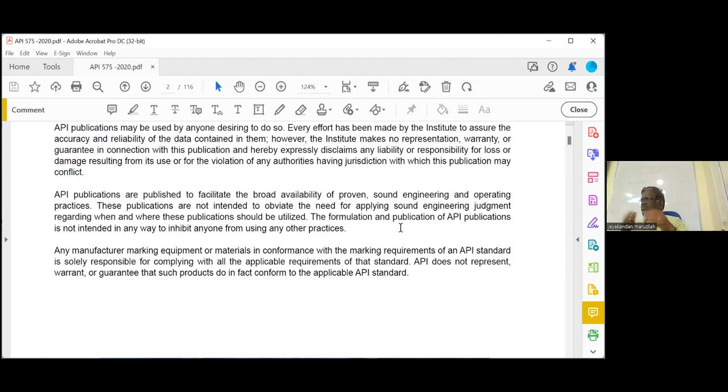Generally the standard pattern so far is around 10 questions, but this time we are expecting there may be an increase in questions in this code book. If they are increasing here, the number of questions in 653 will be reduced. 653 and 575 will be almost the same, will be repeated - actually it's just a revision. It looked like a revision only, a revision of 653.

Okay, so please highlight page number 4. What is meant by alteration? It is a closed book question, mark it as a closed book question. So the definition of alteration is any work on a tank that changes the physical dimension or configuration in accordance with the API 653 guidelines. So alteration means something which will change the physical dimension.

I told you the definition for alteration is revised now. In the previous edition, a nozzle greater than NPS 12 inch is considered an alteration. Now they've changed this in 575 as well as 653. Now, as per the latest version, alteration means only increasing or decreasing the shell height.

Applicable standard we already know - this all repeats, we will not highlight it. Only additional things will be highlighted.

What is meant by change in service? This is very important, this question - what is the change in service? A change from previous operating conditions involving different properties of the stored products such as specific gravity, corrosivity, or different service conditions of temperature. And again understand, change in service may be a severe service or it may be a non-severe service also. So change in service means if you are changing the operating condition or stored product - that's change in service.

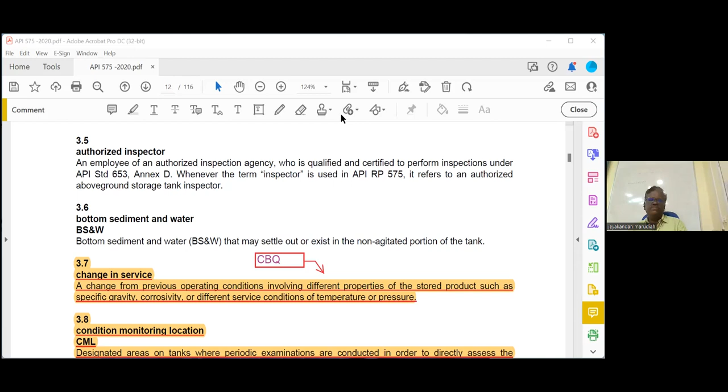Then what is meant by CML? I think this is a new terminology. Okay, but it's not related to tank specifically. What does CML mean? See, when you are monitoring...

What are the different types of inspection we have as per 653? Routine in-service inspections - what is routine inspection? Every month it is conducted by the operator on the ground level, he will check. Next one is called external visual inspection, also without NDT. What is the formula for external visual inspection? Lesser of 5 years or RCA by 4 years. Third one is the UT thickness measurement - what is the formula? RCA by 2N or 15 years, whichever is less.

Now apart from this, what is meant by CML? In the tank area, suppose you think a particular area needs to be regularly monitored using NDT - it may not be only thickness gauge, you can do PTMT. This area fatigue cracks are coming, this area stress corrosion cracks are coming. These periodically monitored areas are called CMLs - condition monitoring locations, where you are monitoring condition using various NDT methods. So highlight this one: designated areas on tanks where periodic examinations are conducted in order to directly assess the condition of the tank. CMLs may contain one or more examination points and utilize multiple examination techniques.

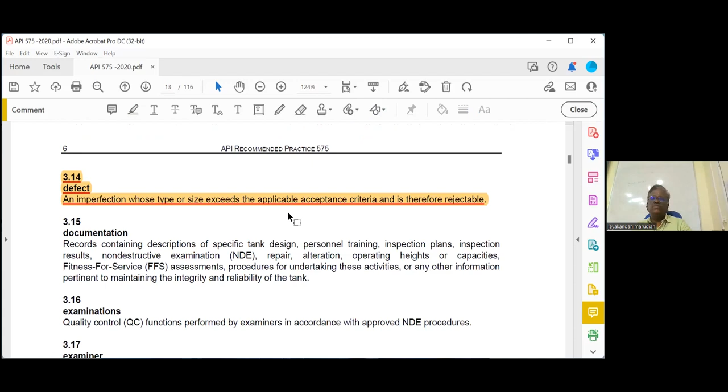So what is meant by examination? As per API code, this is NDE. Normally we call it NDT. They are called examination.

As per code, what is meant by testing? Hydro test, pneumatic test, or leak test to check the integrity of the tank, or mechanical test - they are considered testing. NDT is not considered as testing by ASME and API codes.

Then fitness for service, very important closed book question. A methodology where flaws and other deterioration or damage or operating conditions contained within a tank are assessed in order to determine the integrity of the tank for continuous service.

General corrosion is distributed more or less uniformly over the surface, as opposed to localized corrosion.

Indication - what is meant by indication? The response of the NDT. NDT showing something - a response or evidence resulting from the application of NDE. Mark it as a closed book question.

Then these are not important. Jurisdiction - what is meant by jurisdiction? A legally constituted governmental administration that may adopt rules relating to tank.

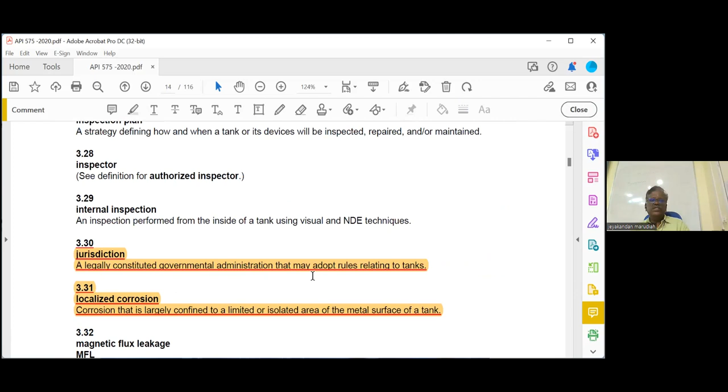Localized corrosion that is largely confined to a limited or isolated area of the metal surface of the tank.

Then this is open book question. What is meant by minimum acceptable thickness? The lowest thickness at which a tank component should operate, as determined by the parameters in the applicable tank design standards such as 650, 653, etc.

And the fitness for service - so what is the minimum required thickness? We call it, in a tank, the minimum acceptable thickness.

Out of service - so what is meant by out of service? Designates that a tank is clean and empty of product. A tank during original construction, removed from service and cleaned or returned - this is all out of service. If it's an empty tank, or a retired tank during construction, this is all considered out of service.

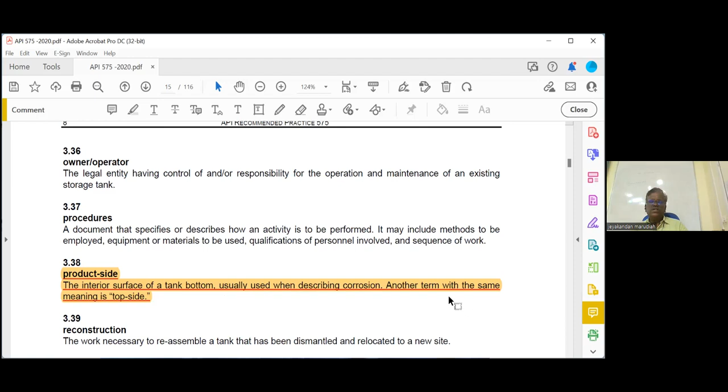The next page, what is meant by product side? The interior surface of the tank bottom, usually used when describing corrosion. Another term for the same meaning is top side. So top side, inside, product side - all are same. Underside, bottom, what is called soil side - these are same.

Then RPB, release prevention barrier - that is a closed book question. Steel bottoms, synthetic materials, clay liners, and all other barriers are a combination of barriers placed in the bottom of or under the above ground tank, which have the following function: preventing the escape of contaminated material and containing or channeling the released materials.

Repair - this is important closed book question. Any work necessary to maintain or restore a tank condition suitable for safe and leak-free operation.

Soil side - the exterior surface of the tank bottom, usually used when describing corrosion. Other terms are underside, bottom side - all are same.

Then sounding - what is meant by sounding? Doing a hammer test. By sound, we can find out whether the thickness is reduced or not by hearing the sound. An inspection technique that relies on impacting the surface - mark it as a closed book question - with a tapping rod and listening for hollow sounds that indicate delamination or loss of continuity.

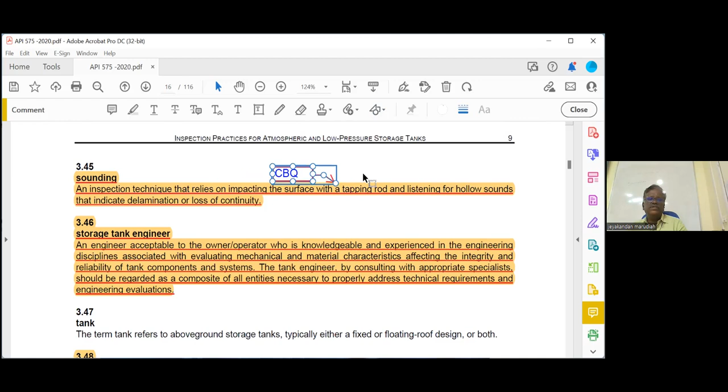Then who is a storage tank engineer? An engineer acceptable to the owner-operator who is knowledgeable and experienced in the engineering discipline associated with evaluating mechanical and material characteristics. Then temporary repairs - repairs made to a storage tank to restore sufficient integrity to continue operation until a permanent repair.

Mark it as a closed book question. But we didn't discuss anything about temporary repair in 653.

Because I told you during the 653 class, the difference between pressure vessel piping will be on one side, storage tank will be on the other side.

In pressure vessel and piping, all fillet weld patches are considered temporary repairs, so they should be replaced in the next shutdown. But in storage tank, fillet weld patches are considered as permanent repair, provided the owner-operator approves that. In piping and pressure vessel, they are never considered a permanent repair - they are just for the time being.

Okay, so for tank, fillet weld patch is permanent.

Then water bottom - see the definition of bottom sediment and water.

Bottom sediment here, I forgot to highlight. Please go to section 3.6, bottom sediment and water. This is important - bottom sediment that may settle out in the non-agitated portion of the tank at the bottom. Mark it as a closed book question.

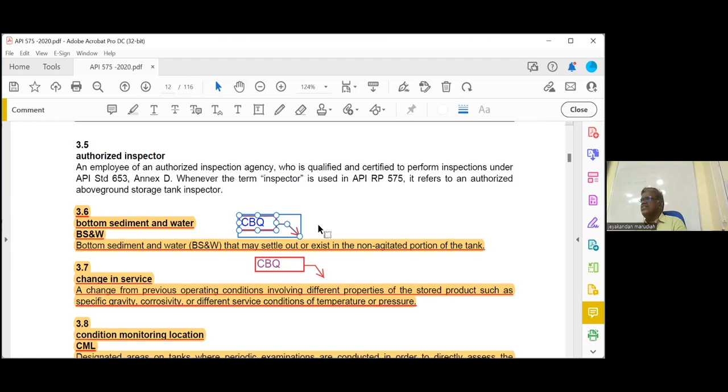Now we will go to the terms - type of storage tanks. Section 4.1.1, highlight the last line: guidelines for inspection of pressure vessels operating at pressure greater than 15 psi are covered in API 572. Remember, during the introduction class last week I told you API 650 covers only atmospheric above ground storage tanks.

But there may be internal pressure. What is the maximum internal pressure allowed? 2.5 psi. Vacuum, how much is allowed? 0.5, not 0.25. Now, if the pressure is more than 2.5 up to 15 psi, it is covered in API 620, the low pressure storage tank code. But if the pressure is more than 15 psi, it is covered under pressure vessel rules - guidelines for inspecting vessels greater than 15 psi are in API 572, which covers pressure vessel fabrication.

That's temperature. Next, storage tank - on the pressure side, this one is API 620, low pressure storage tank, it will come under storage tank temperature considerations. Now please go to 4.1.4, storage tanks with auxiliary equipment.

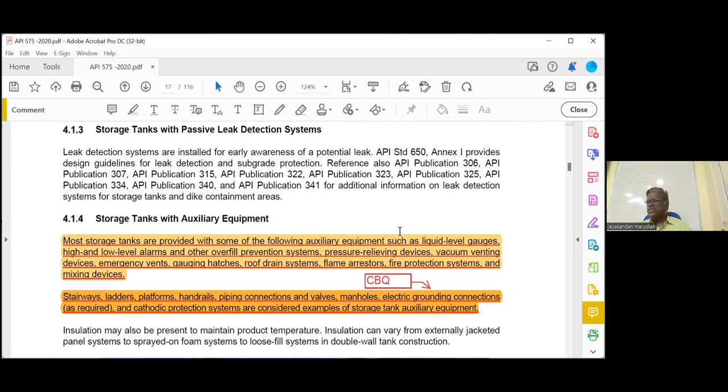Then, atmospheric storage tanks - section 4.2.1, highlight the first three lines. Atmospheric storage tanks are designed to operate with internal gas or vapor space at a pressure close to atmospheric pressure. Such tanks are usually constructed of carbon steel, alloy steel, aluminum, or other metals depending on the service. Remember, when API 650 came into picture in 1961, before that it was API 12C. Apart from 12C, there was also 12A, 12B, 12D. What are 12A and 12B? Bolted tanks and riveted tanks. These are not important now - generally welded tanks, some riveted tanks were 12A, and bolted tanks were 12B. 12A is now withdrawn, 12C is now changed to 650, and 12D and 12E are also withdrawn - they are not in use now.

Now, use of atmospheric storage tanks - where do we use atmospheric storage tanks versus low pressure storage tanks? It depends on what product you are going to store. Highlight this: atmospheric storage tanks in petroleum are normally used for fluids having true vapor pressure less than atmospheric pressure. That line is important - vapor pressure should be less than atmospheric pressure.

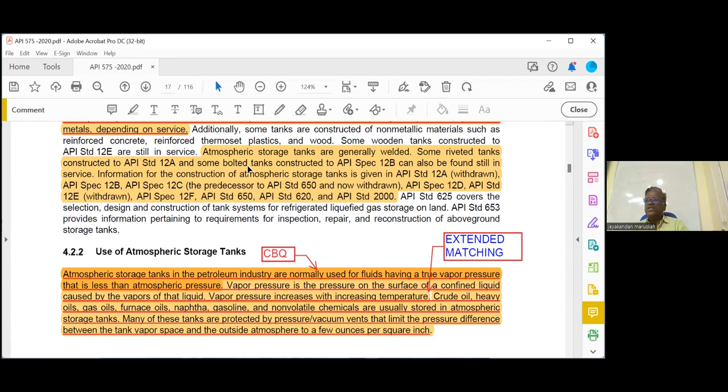For extended matching, I told you there are three other patterns - one is multi-choice, another is multi-response, third is extended matching, and fourth is drag and drop. It was asked in extended matching which product we store in atmospheric storage tanks - so this is the list. Low pressure storage is given later - what products can we store in low pressure tanks? We have to match it.

Next, atmospheric storage tanks, 4231, cone roof tanks. The most common type of atmospheric storage tank is the fixed cone roof tank. Fixed cone roof tanks are typically up to 300 feet in diameter and 64 feet in height, although larger diameters have been built.

These roofs are normally supported by internal structures - rafters, girders, and columns. So generally they will have columns supported on the bottom, but can be fully self-supporting in smaller diameters, typically 60 feet or less.

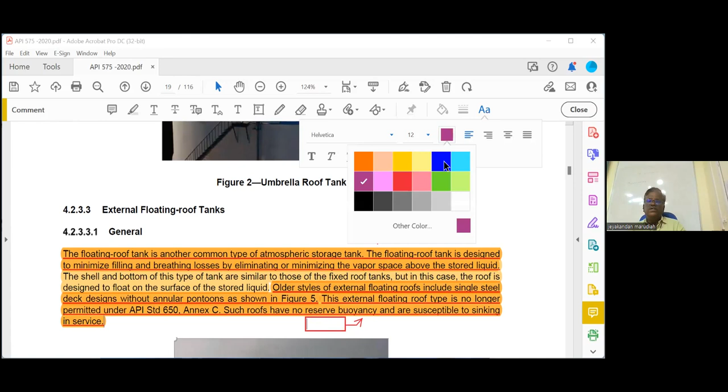Older type external floating roofs include a single deck design without annular pontoons. This type is no longer permitted by API 650 Annex C - we need a pontoon now. Older types did not have a pontoon; this is important, it is what was asked in the last exam. Such roofs have no reserve buoyancy and are susceptible to sinking in service.

42332. Some floating roof tanks have fixed aluminum geodesic dome roofs installed on top of the tank shell to reduce product vapor loss or to eliminate the need for drain water - it will not allow water in. These are considered internal floating roofs for the purpose of emission control, confined space, etc. So internal floating means there will be a fixed aluminum roof and a floating roof.

You can see here, this is the annular pontoon - at its center there is plate only. This will be the pontoon. Pontoon means the part which floats on the roof, and this is the complete double deck pontoon.

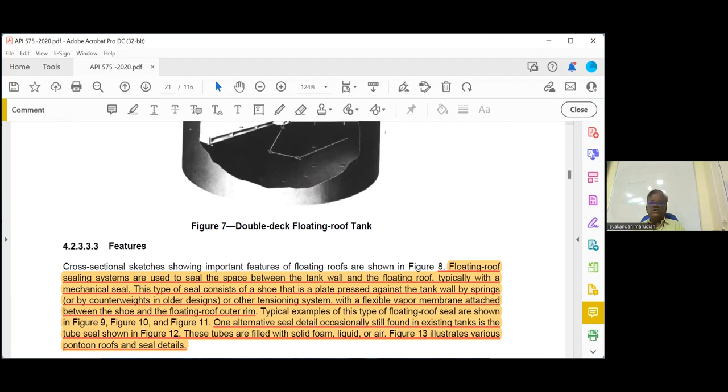42333. Floating roof sealing systems are used to seal the space between the tank wall and the floating roof, typically with a mechanical seal. This type of seal consists of a shoe - a plate pressed against the tank wall by springs or other tensioning system, with a flexible vapor membrane attached between the shoe and the floating roof outer rim. One alternative seal detail occasionally still found in existing tanks is the tube seal shown in figure 12.

These tubes are filled with solid foam - foam-filled seals are still in use, filled inside with foam. This is the floating shoe seal - you can see the plate presses against the shell so that there is no vapor loss. This is the foam-filled type.

These are not important, please go to page number 23. Low pressure storage tank, 4.3.1.

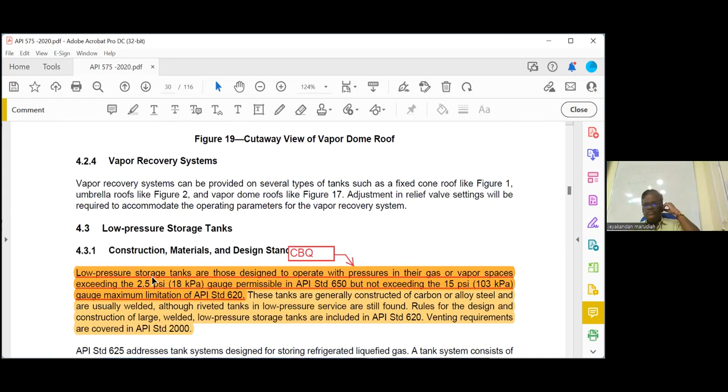Highlight this, it's a closed book question. Low pressure storage tanks are designed to operate at a pressure exceeding 2.5 psi, permissible by API 650, but not exceeding 15 psi - that is the maximum limitation under API 620.

Use of low pressure storage tanks - this is important, you should know what we store in atmospheric storage tanks versus low pressure storage tanks. Low pressure storage tanks are used for storage of more volatile fluids having a true vapor pressure exceeding the limit in API 650 but not more than 15 psi: light crude oil, gasoline blending stock, light naphtha, volatile chemicals, LPG, LNG, liquid oxygen - all of this we can store. Mark it as an open book question.

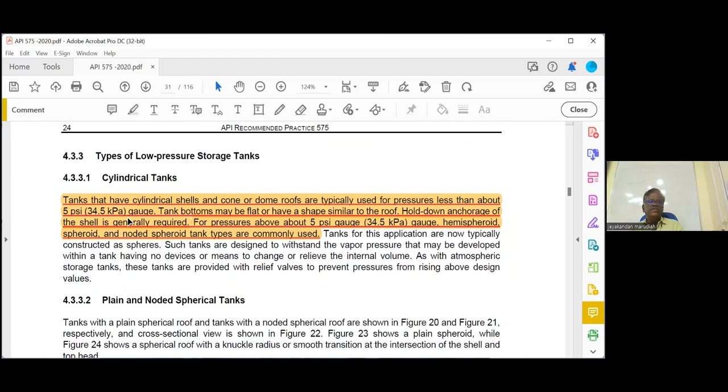Types of low pressure storage tanks. Tanks that have cylindrical shells and cone or dome roofs are typically used for pressure less than 5 psi. This is about the low pressure. Tank bottoms may be flat or have shape similar to the roof. Hold down anchorage at the shell is generally required for pressure above 5 psi.

Hemispheroid, spheroid, and noded spheroid tank types are commonly used. So what is a hemispheroid? You can see this one here. This is called the hemispheroid. Next page we can see here, this is the noded hemispheroid.

Then this is the plain spheroid, which we call a sphere. And this is the plain hemispheroid with the knuckle radius. And this is called again noded spheroid. Okay, these are not important.

Then please go to chapter 5, section 5.1.1, reason for inspection, page number 28.

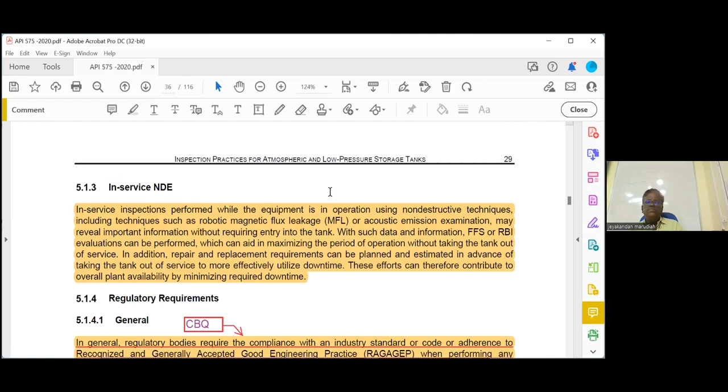This is an important closed book question. The basic reasons for inspection are to determine the physical condition of the tank and to determine the type, rate, and cause of damage mechanism and associated deterioration. That is the basics for the inspection: physical condition, and what type and what rate of damage mechanism happens.

Then process safety, highlight section 5.1.2. One of the primary reasons to conduct periodic scheduled inspection is to identify deficiencies that could result in a process safety incident such as loss of containment, which could lead to fire, toxic release, or other environmental hazard. These deficiencies should be addressed as soon as practical through evaluation, further inspection, or repair.

The next page, regulatory requirements, section 5.1.4.1. This is an important closed book question.

In general, regulation means local government rules. Local government requires compliance, the industry and the standard to adhere to recognized and generally accepted good engineering practice, that is called RAGAGEP. When performing any inspection and repair activities, many regulatory groups, including OSHA, PHMSA in the United States, require that operating companies follow internal procedure. This last line is important, so we have to follow the company internal procedure in addition to following the codes.

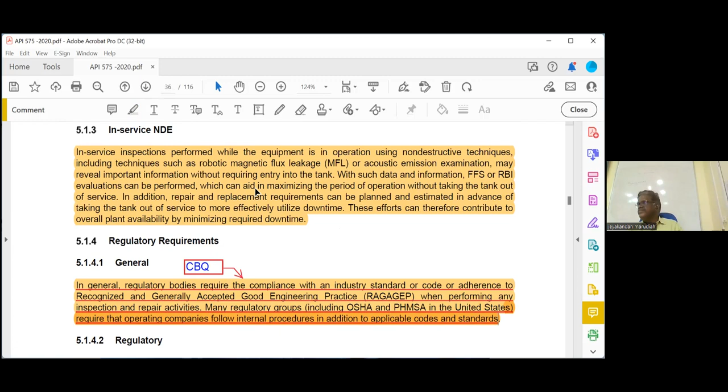These are not important. Then 5.2.1, deterioration of the tank. Corrosion is the primary cause of the deterioration of steel storage tanks and accessories. Locating and measuring the extent of corrosion is a major reason for storage tank inspection. If left unchecked, tank deterioration can progressively lead to failure, which may adversely affect or endanger personnel or the public, environmental and property damage, and business interruption or damage to reputation.

Now we will go to the 1 by 1 portion. This is actually almost our revision of the 653 now. Many things we have already seen in 653.

Atmospheric corrosion can occur on all metallic tank components exposed to atmosphere. The type of tank, construction details, environmental conditions can all affect the location, extent, and severity of external corrosion. For example, a sulfurous, acidic, and marine atmosphere can damage protective coatings and increase the rate of corrosion. External surfaces of the tank and auxiliary equipment will corrode more rapidly if they are not protected with coatings. Where surfaces are in contact with moisture or the ground, extended contact with water is likely to cause localized corrosion.

Before, there was a sentence here which is now removed. Suppose you are in India and you want to construct a house, what facing will they ask about, south facing, east facing, north facing, west facing? Now which facing house will receive more sunlight?

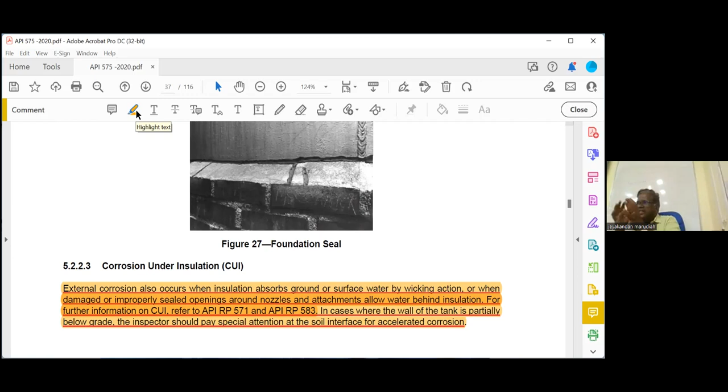Next page, riveted tanks. You can still have some riveted tanks - I think 653 covers this. For riveted tanks, 6 inches away we take the efficiency as 1. Remember, for welded, 1 inch away we take E equal to 1. For riveted tanks, 6 inches away we take the efficiency as 1.

Now this line is important: riveted tanks have many niches where concentration occurs, because at the rivet there is a gap, which causes concentration cell corrosion. Leaks at the seams of riveted tanks can cause failure of the external coatings, allowing external corrosion to develop. If there is a leakage, it will affect the paint and coating, which then causes corrosion.

Then internal corrosion: the occurrence of internal corrosion in a storage tank depends on the contents of the tank and the material of construction - what you are storing and what the material is. That is a closed book question.

Now the next topic is product vapor and BSW. If you take a storage tank, on the underside, what corrosion happens? This side we call soil corrosion - that's why we go for cathodic protection. And what corrosion happens on this side? This is called bottom sediment and water corrosion - for that we go for lining.

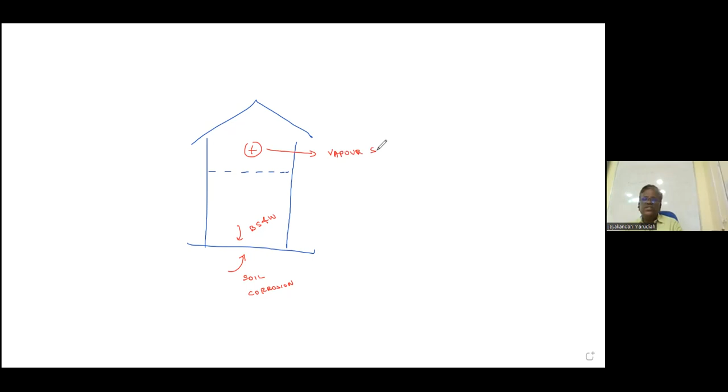But here there can be a portion - suppose this is my roof, and my fill level is only up to here - this area may have a portion. This is called vapor space. Vapor space is affected due to oxides - they can evaporate, and that oxygen and other oxides can promote corrosion. So these are the important points.

Crude oil and petroleum product tanks are usually constructed of carbon steel. Internal corrosion of these tanks in the vapor space above the liquid level can be caused by H2S vapor (hydrogen sulfide), water vapor, oxygen, or any combination of these. In areas in contact with the stored liquid, corrosion is commonly caused by acid salts, hydrogen sulfide and other sulfur compounds, dew point corrosion, or contaminated water that settles out and mixes with solids, typically referred to as BS&W, bottom sediment and water.

So in the vapor space, corrosion is caused by hydrogen sulfide vapor, water vapor and oxygen, or a combination of these. At the bottom, it's caused by hydrogen sulfide, other sulfur compounds, dew point corrosion and contaminated water, referred to as bottom sediment and water. Both of these are open book questions.

Linings. Some tanks can have a lining. What is the purpose of the lining? To protect the bottom. In some particularly corrosive service, it may be necessary to construct tanks with more resistant materials such as aluminum or stainless steel. These experience deterioration less commonly, but cost more. These details are not important, leave them.

Now we'll go to wooden tanks. Wooden tanks are very rare now; they are the older style of tanks. Wooden tanks are generally used for storage of food products, like fruits, for food product storage.

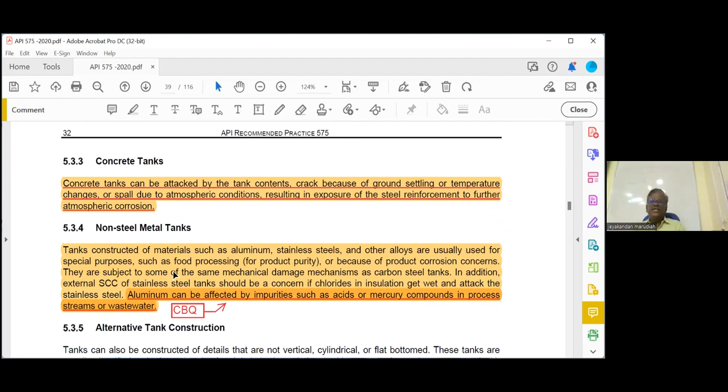So the wooden tanks need to be kept moist all the time. If they dry out, they will start to leak and crack.

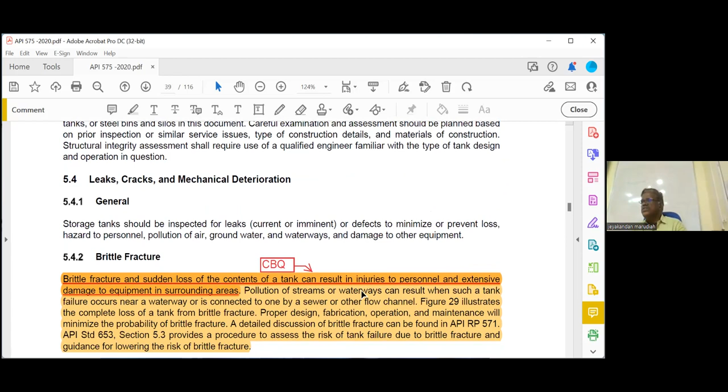Which one is it? Yeah, it's almost a revision from 653. The next page covers cracks.

Crack-like flaws can result from a number of causes, including deficient design, fabrication, and maintenance. The most likely points where crack-like flaws occur are at the bottom to shell details, around nozzle connections, manholes, around rivet heads, and welded brackets. This line is open book.

The lower shell to sketch plate or shell to bottom weld is especially critical because in relatively large or hot tanks, there is a higher likelihood of this detail developing crack-like flaws due to high stress. So the shell to bottom weld is highly critical. Sketch plate means if you are not using an annular plate, it will have a higher thickness than the bottom plate. If you are using the same bottom plate to weld with the shell, that plate is called a sketch plate. So the shell to bottom weld crack is very dangerous and should be immediately repaired.

Now please go to section 5.4.6, settlement. Third line: large or uneven amounts of settlement can cause nozzles with attached piping to become overstressed and possibly deformed or cracked, or interfere with the normal operation of the floating roof. Significant amounts of uneven settlement should be cause for concern and further investigation.

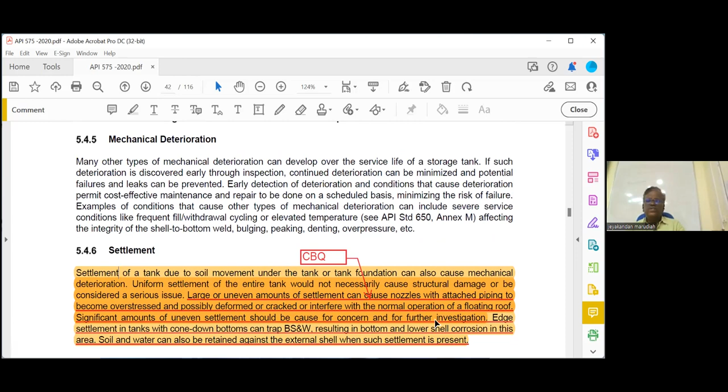That line is important. This also highlights that edge settlement in tanks with cone down bottoms can trap bottom sediment and water, resulting in bottom and lower shell corrosion in this area. Soil and water can also retain against the external shell when such settlement is present.

Then fixed roof equipment. So what are the deterioration issues of the auxiliary equipment? Pressure and vacuum vents and flame arrestors can fail to operate for the following reasons. That is an open book question, important.

For flame arrestors and pressure and vacuum vents: the presence of fouling material or debris, corrosion between moving parts and guides or seats, deposit of foreign substances by birds or insects, formation of ice, accumulation of grit blasting material, covering of the vent opening with plastic or plugging of vent openings, tampering by unauthorized persons, improper setting of the pressure relief actuation set point or vacuum relief actuation set point. These may be the reasons for improper functioning of the pressure and vacuum vent and flame arrestor. This is an open book question.

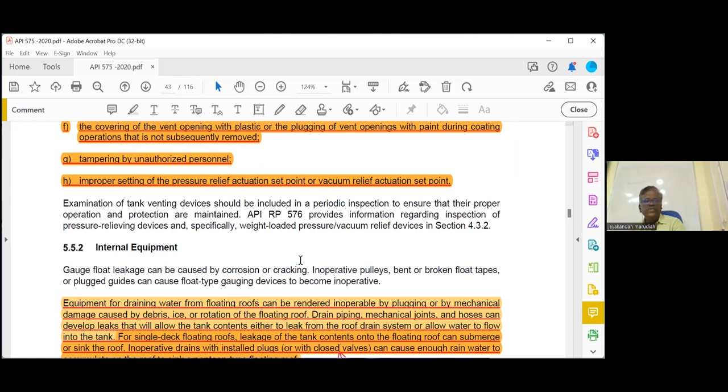Then internal equipment. Equipment for draining water from floating roofs can be rendered inoperable by plugging or by mechanical damage caused by debris, ice, or rotation of the floating roof. Suppose the drain pipe is blocked due to some foreign material, or the valve is not opening or closing properly, then rain will be stored on the floating roof, and it may sink.

For single deck floating roofs, leakage of the tank contents onto the floating roof can submerge or sink the roof. Inoperative drains with installed plugs can cause enough rainwater to accumulate on the roof to sink the pontoon type floating roof. That is an open book question.

Now we'll go to developing an inspection plan. See, 653 does not mention this at all. Generally, if you are going for inspection, you should have an inspection plan. 653 is not covered actually.

Then the first question: who will prepare the inspection plan? It is a collaborative work of the inspector, engineer, operations, and process personnel—all of them will sit together and prepare the inspection plan. What will the inspection plan have?

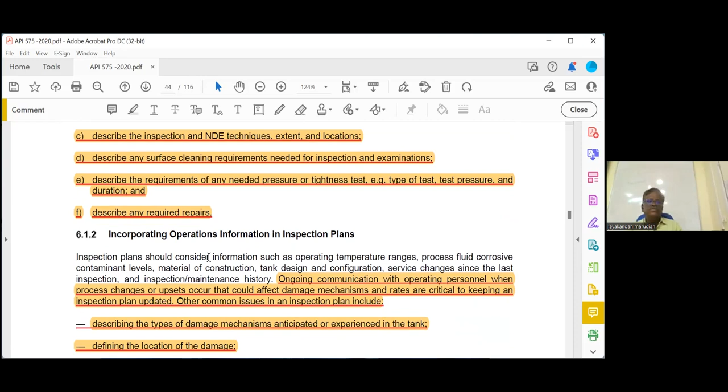The API 653 inspector should periodically communicate with operation, since operation is the one continuously monitoring the tank. Suppose they face some problem, they have to inform the inspector there is a problem in that area. So the inspector should prepare himself, as there is a possibility of corrosion or expected severe corrosion.

Highlight this: ongoing communication with the operating personnel when process changes or upsets occur that could affect damage mechanism and rates are critical in keeping the inspection plan updated. Other common issues in the inspection plan include describing the type of damage mechanism anticipated and experienced, defining the location of damage, and defining the special access requirement.

Before starting inspection, the inspector should know the prior history of the tank. Prior history means how many years the tank has been in operation, what product it is storing, and what were the past problems. Prior to conducting internal or external inspection, the inspector should thoroughly review any available inspection record to become familiar with the previous problems and the recommendations noted. That is important.

Then please go to section 6.2.3, inspection methodologies. This is an open book question, again important.

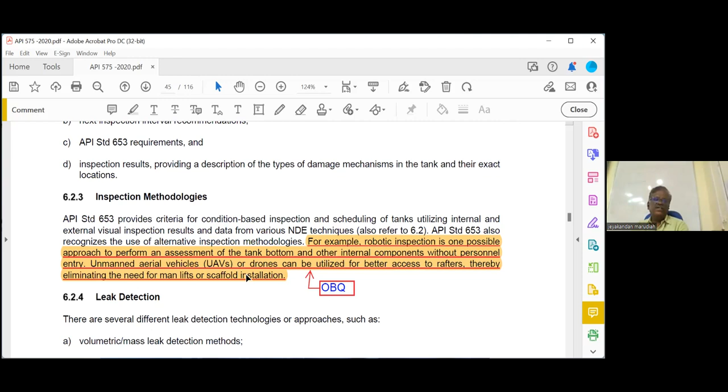Then highlight this one: leak detection. Many of the technologies used for leak detection are defined in API 334. This was again recently asked as an open book question. So leak detection methods are identified in API 334. Open book question.

The next page, RBI. Now, what is RBI? Just let me briefly explain. First, I told you there is a formula for RBI. Do you remember the formula for risk? Just 5 minutes, no problem, spending 5 minutes is worth it. Risk equals probability of failure multiplied by consequence of failure, or likelihood of failure multiplied by consequence of failure. That is the formula for risk.

How does RBI work? First, you have to understand whether you want to do inspection as per 653 or inspection as per 580. 580 is the RBI. This will be decided by the owner operator, not by the inspector. Who will decide? The owner.

Suppose if you decide to go for RBI, then each and every storage tank has to be assessed for risk. So what is the formula for risk? I told you: probability of failure and consequence of failure. Now, what is meant by probability of failure? It means what is the possibility of a leakage of the tank. Failure means leakage, that's all. No other failures are considered as a failure. Failure means leaking.

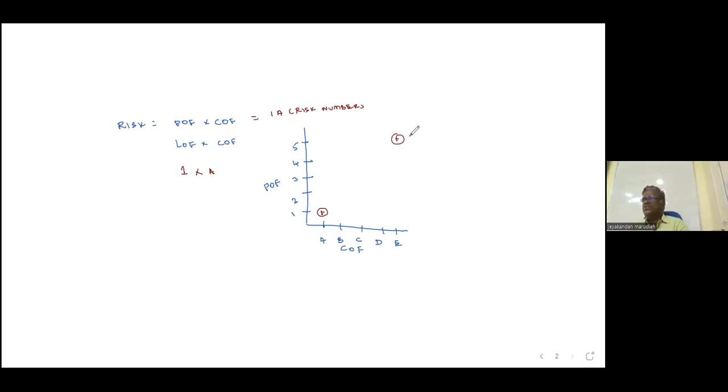Then which tank will have a very high risk? 5E. So what will the RBI team do? Each and every tank, they will assess the probability and the consequence. They will give numbers, risk numbers they will give: 1A, 1B, 1C, 1D. So the tanks will be marked in various locations.

Like this. After that, the owner will put some lines. Any tank whose risk number falls here is called a high risk tank. These are called medium risk. Now, these are called low risk.

Now, what is the purpose of giving this numbering? First, if you take API 653, what is the thickness measurement interval or external visual inspection? What is the external visual inspection? What is the rule? External visual, RCA by 4N.

What is RCA? Remaining corrosion allowance. N is the corrosion rate. So if you put RCA by N, it will show remaining life. Actually, one-fourth of the remaining life you have to do it. But if you go here, we have to do 5 years, whichever is less, 5 years. But what API 580 will say is, if the tank is low risk, we can do it after 20 years also.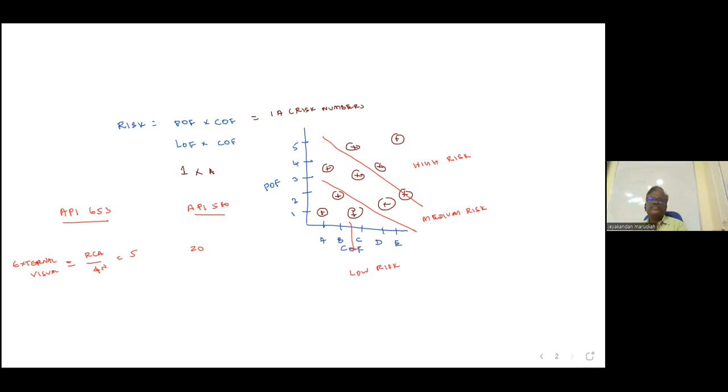Is it okay? Right. So highlight this one, risk-based inspection. Inspection plan based upon the assessment of risk associated with the tank failure by determining the likelihood of failure and the consequence of failure is referred to as risk-based inspection. That line is important.

RBI can be used to determine the inspection interval and type and extent of future inspection examination. API 580 provides minimum requirements that must be considered to carry out the systematic evaluation of both the likelihood and the consequence. So API 580 provides the minimum requirements, and RBI can be used to determine—that line is important—the inspection interval and the type and extent of future inspection.

Then, probability of failure assessment. This is another important point. Identifying and evaluating potential damage mechanisms, current tank condition, and the effectiveness of past inspections are important steps in assessing the likelihood of tank failure. The likelihood assessment should consider all forms of degradation that could reasonably be expected to affect the tank in that particular service. That is important, open question.

Then consequence, highlight this one. Identifying the process fluid, potential injuries, loss of containment, environment impact, and unit loss of production are important consequences associated with the failure of the tank.

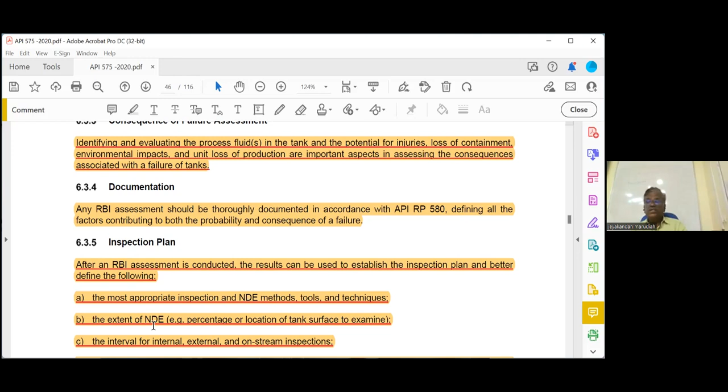The inspection plan: after an RBI assessment is conducted, the results can be used to establish the inspection plan and better define the following: the most appropriate inspection and NDE methods, tools, and techniques, extent of NDE, interval for internal, external, or on-stream inspection, and the prevention and mitigation steps. Just to highlight.

Now we will go to the inspection timing, chapter 7, 7.1.2. Last line is important: holes in the tank should be reviewed by the inspector or storage tank engineer and addressed immediately. That line is a closed question. If there are any holes in the tank, it should be addressed immediately by the engineer and/or inspector, and we have to repair it immediately.

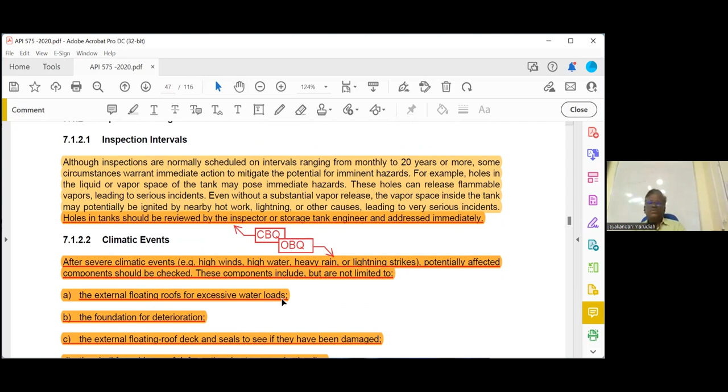Then climatic events: for severe climatic events—high winds, this is an open book question—high water, heavy rain, and lightning, potentially affected components should be checked. These components include but are not limited to external floating roofs for excessive water load. After heavy rain, you have to go and check the external floating roof to see whether water is collecting there, the foundation for deterioration, the external floating roof deck and seals to see if they have been damaged, and the shell for evidence of deformation due to excessive loading. All this we have to check after heavy rain or high wind.

After seismic events significant enough to impact the integrity of components, floating roof and associated tank piping, an inspection shall be performed. That's also important.

Then opportunities for inspection coordinated with operational issues. Highlight the third line: internal inspection interval should also be based on experience and risk as determined by someone knowledgeable with the tanks and its operation. In no case should the maximum interval of inspection exceed what is specified in 653. The coordination requires knowledge of the internal inspection intervals and operating conditions.

So what is the interval as per 653? I told it: 10, 20, 30. Generally it will be every 10 years you have to do internal inspection, but you have some additional options like lining which can extend that period. Maximum 20 years without a release prevention barrier, and with the release prevention barrier, maximum 30 years.

Then condition-based inspection. Inspection schedule is performed based on the past, current, and expected future condition of your tank, as defined at the condition-based inspection. Highlight these two lines.

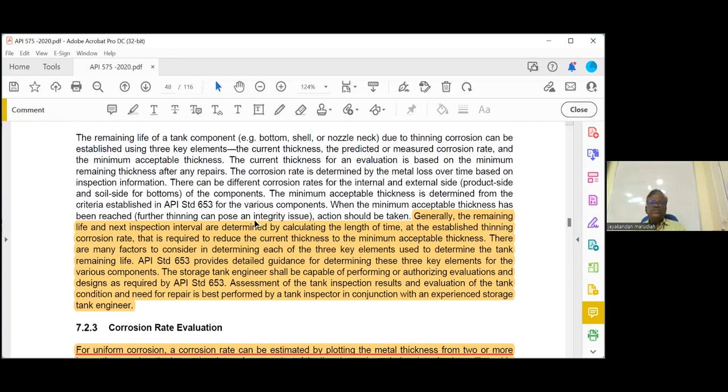Then corrosion rate evaluation. Now if you see the corrosion rate, what formula are we using here? T previous minus T actual, divided by the number of years.

Suppose if you know the corrosion rate, you can make a plot. There is a graph given to find out what the thickness will be after 5 years. For uniform corrosion, highlight this one: a corrosion rate can be estimated by plotting the metal thickness from 2 or more inspections against the inspection dates. An extension of the line drawn through the plotted points will provide an estimation of the time at which the metal will reach the minimum acceptable limit, assuming uniform linear corrosion. In addition to natural variation, changes to corrosion such as operating condition, temperature, cathodic protection, and other factors should be investigated to determine the corrosion rate.

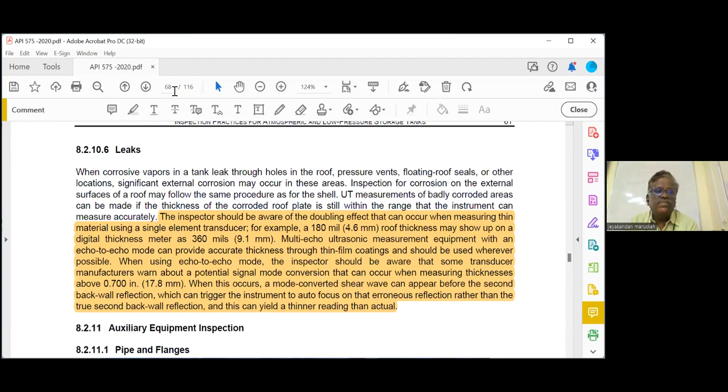Now go to the next page. Service stresses, page number 42. Highlight the fourth line, 7.3.1.3: bottom areas away from the shell and annular ring need only be thick enough to be leak tight and at or above minimum acceptable thickness per standard 653 at the next out of service inspection.

Remember, other areas of the bottom, even at next inspection, should be 0.1 inch. But if you have thick film lining or release prevention barrier, 0.05 inch is allowed. But what is meant by critical zone? Around the shell, 3 inches and outside extension, there should be at least 0.1 inch. Even if you have a release prevention barrier or lining, anything, it should be minimum 0.1 inch.

Then these are not important. So please go to the product consideration, page number 43. Storage tank shell plate thickness is normally calculated to contain a fluid of a desired specific gravity, usually water for the hydrostatic test. So in the hydrostatic formula we are only using water in the shell calculation, that's why there is no specific gravity included in the hydrostatic formula.

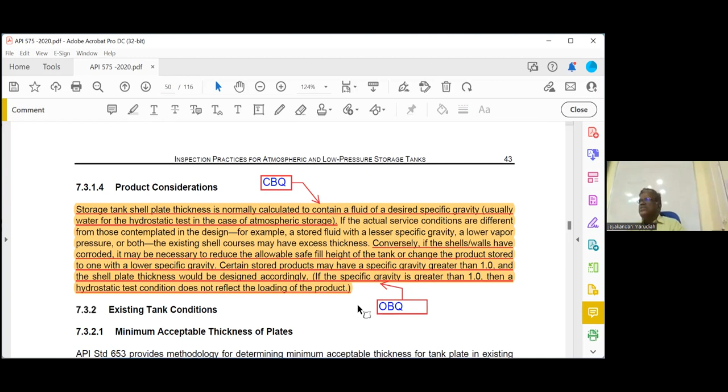Then minimum acceptable thickness for structural members, this is important. 7.3.2.3: for structural members and parts such as roof supports and column platforms, normal accepted industry practice for structural designs, such as methods provided in steel construction standards, can be used to calculate the allowable loads for the new condition. So what is the structural member thickness? It is usually based on normal accepted industry practice — we have to follow what the normal minimum thickness should be. Just follow this; it's an open book question.

Then similar service methodology — what is meant by similar service? I told you, only one tank, called the control tank, will go for complete internal and external inspection; other tanks will go only external, no internal. The internal inspection interval for atmospheric storage tanks as defined by 653 is governed by the corrosion rate of the tank bottom — that line is important. Generally, internal inspection is governed by the corrosion rate of the tank bottom.

Next page 44, highlight these two lines. Similar service is recognized within industry as a means for scheduling the internal inspection intervals in 510, 570, and 653, which use corrosion rate as the basis for establishing the inspection interval.

Then 7.4.2, highlight the third line. Often, multiple inspection methods are utilized to establish the minimum bottom thickness, that is MFL with the follow-up, to ensure that the worst area of soil side corrosion has been detected. When an owner operator chooses to apply similar service to estimate the tank bottom product side and the soil side, the owner operator should consider the factors listed in B1. We will see B1 later.

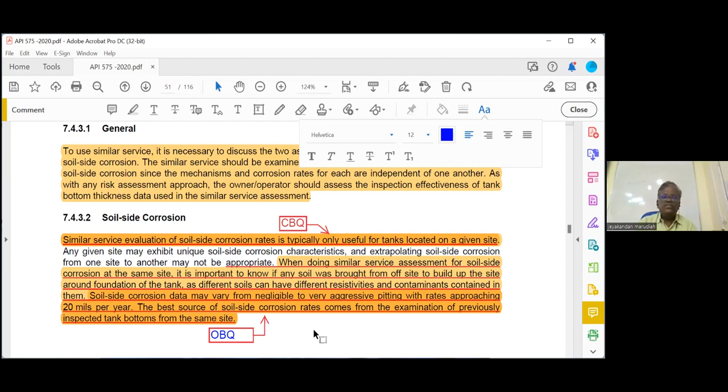Then inspection, please go to 8.1.1 safety precautions. Before entering or re-entering any tank, appropriate safety steps are necessary. That line is important - before entering or re-entering, you have to follow safety. These precautions are discussed in API 2015, so we have to check API standard 2015.

Generally, such actions include, but are not limited to the following: isolation from any source of toxic or gas-generating fluids, the use of blinds or disconnection, removal of hazardous liquid and gases, removal of gas generating pyrophoric or toxic waste. What is pyrophoric? It is phosphorus. What is the problem with phosphorus? It is self-ignition - when phosphorus becomes dry, it will automatically catch fire.

So what does the code recommend? Suppose you know that the stored product will have phosphorus inside a tank. Even after cleaning the tank, when you are entering, any corner's phosphorus residue can catch fire. So what do you have to do? That's why when you are going for inspection, you have to keep the tank bottom moistened - just wash with water, because it will not fire, it will not ignite.

And this is an open book question. Assurance of an atmosphere that contains sufficient oxygen, where applicable OSHA and locally applicable safety agency requirements for safe entry should be followed. Utilizing OSHA CFR 1910.146 and 1926 would be required if under the jurisdiction, and it's important - open book question.

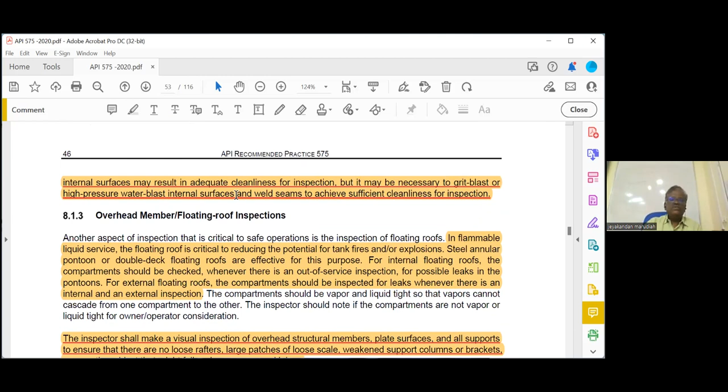Then tank cleaning, last slide. For relatively clean product service, water washing the internal surface may result in adequate cleanliness for inspection, but it may be necessary to grit blast or high pressure water blast internal surfaces and weld seams to achieve sufficient cleanliness.

Then highlight this paragraph. When you are entering the tank, first you have to look at the top, whether any loose structures are there which can fall. So first you have to check.

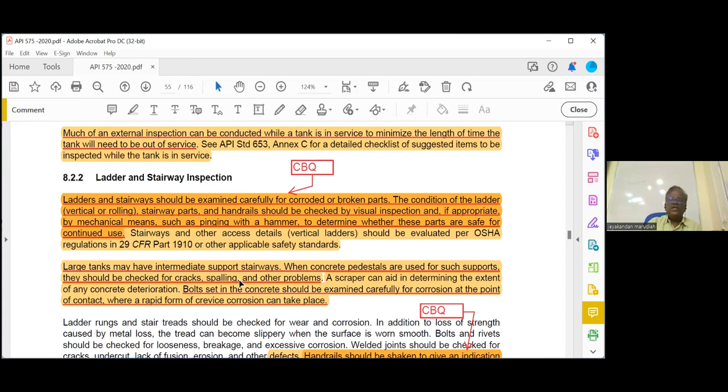Handrails should be shaken to give an indication of their soundness. Particular attention should be given to tubular handrails which may have corroded from the inside.

Then walkways. For walkways we should check whether they are rough.

If the corrosion surfaces are coated, corrosion may exist under the coating film. Rust stains visible through the coating and gentle lifting of the coating are evidence of such corrosion.

Then platform. Suppose generally on a platform, if you are using a steel platform, there is a dent in the platform, something fallen on the platform, there may be water storing. The best way is, no need to remove that, just make a hole on the platform so that there will be no water storing. It will come down.

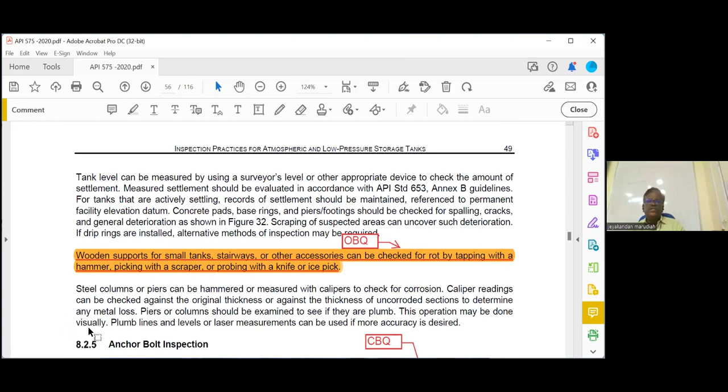Wooden supports for small tanks, stairways, or other accessories can be checked for rot by tapping with a hammer, picking with a scraper, or probing with a knife or ice pick. That is important, an open book question. Wooden support, how we will check?

Then anchor bolt. How we will check the anchor bolt? We can tap with a hammer to see whether it is shaking, or you can tap on the nut. This is a closed book question.

A tap with a hammer to the side of the nut may reveal severe corrosion of the anchor bolt below the base plate. Less severe damage may not be detected by such a test. Visual inspection can be aided by removing the nuts one at a time and supplemented by UT examination.

The anchor bolt nut should be checked for a snug fit to the anchor chair top plate. So this is the anchor bolt, you have to check it.

Next page. Yeah, these are the anchor bolts.

Then grounding connection. The grounding connection should have low resistance. What is the resistance allowed, maximum 25 ohms. The total resistance from tank to earth should not exceed approximately 25 ohms. API 2003 provides information concerning the grounding of tanks to prevent ignition from static electricity, lightning strikes, or stray current problems.

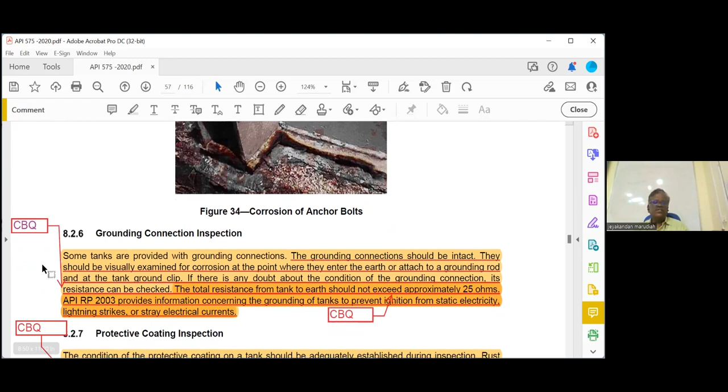That also to follow 2003.

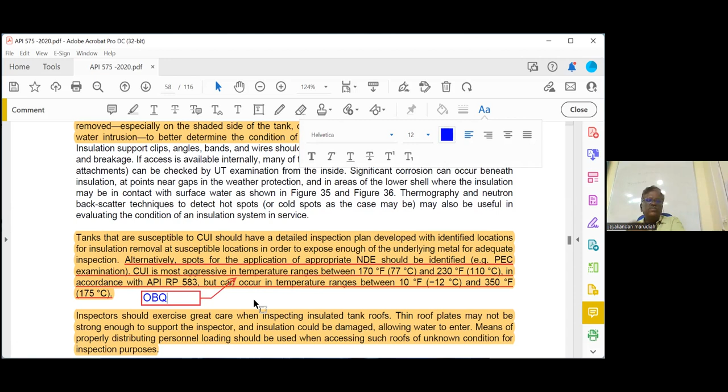CUI is most aggressive at temperatures between 170 to 230 in accordance with API 583, but can occur in the 10 to 350 degree Fahrenheit range. Just mark it as an open book question. So this is a new requirement they have given: 170 to 230 will be more aggressive according to 583.

No, that has been removed now from 571. Generally it is 10 to 350.

Then these are not important. So please go to page number 53. Upper shell course measurement.

The upper 2 feet of the upper shell plates can corrode at a higher rate than the lower shell plate because of constant exposure to the atmosphere on both sides.

That is if it is a coating failure, there is a possibility.

Then establishing the shell CMLs for general corrosion, highlight the last 3 lines. It is typical to set up CMLs on the top, middle, and bottom of a given plate in easy to access locations such as near ladders or stairs. The CMLs do not need to be in a vertical line, and since this technique monitors general corrosion, repeating readings at the exact same location is not critical.

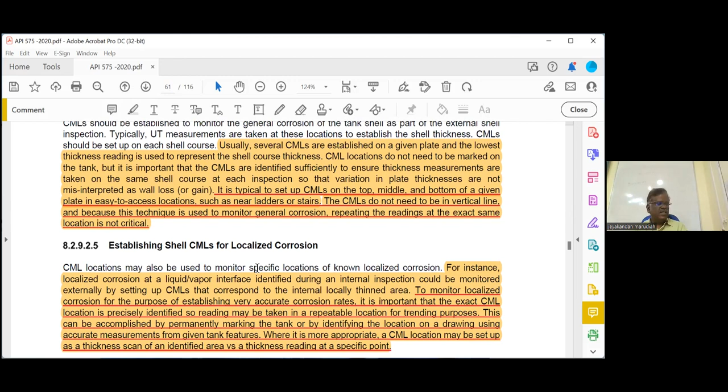Condition monitoring locations. UT thickness is one type of CML, cracking is also a CML. Then these are not important.

Highlight 82926. UT measurement should be taken only by trained personnel using a properly calibrated thickness measurement instrument and an appropriate thickness measurement procedure. Coatings can affect UT readings, and the examiner may need to compensate for the coating when recording metal thickness. Modern ultrasonic pulse echo thickness gauges, when properly calibrated, allow direct metal thickness readings to be taken through the thin film. This is important.

Who will maintain the record of this? This is the examiner's employer. Closed book question: the examiner's employer should maintain certification records of the examiners employed, including date and results of personnel qualification, and should make them available to the authorized inspector.

Highlight the stiffeners and wind girders, first line. The outside stiffeners and wind girders of a tank can be inspected visually and by hammer testing.

The last 3 lines are important, highlight them. If the magnetic particle method is detecting cracks while the tank is in service, the current flow prod technique should not be used because of the danger of sparks. For this type of examination, a permanent magnet or electromagnetic yoke technique should be used. Prod is not allowed on an in-service tank.

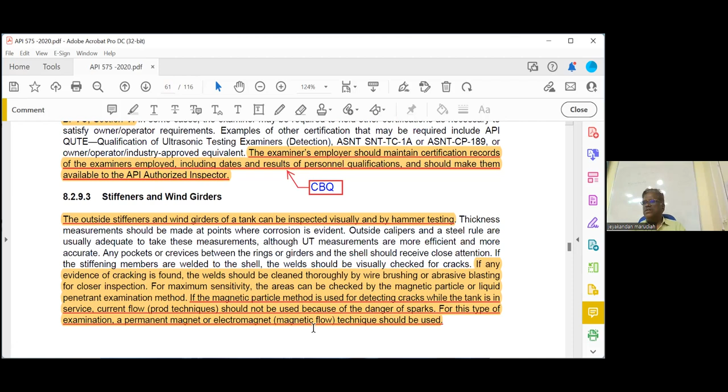Then caustic corrosion, right? These 2 lines are important. If caustic or amine solutions are stored in a tank and the corrosion specialist believes the storage condition may warrant an examination, the tank should be checked for evidence of damage from caustic, sometimes referred to as caustic embrittlement or amine SCC. That line is a closed book question. If you are storing caustic, you have to expect caustic stress corrosion cracking.

Where will it occur? At the bottom heating units, because for caustic we need a temperature more than 170. The crack will start inside the tank and it will be a through crack. There will be white salt on the cracks.

Caustic is stored, and the most probable place for this is around the connections for internal heating units or coils. This type of deterioration is manifested by cracks that start on the inside of the tank and progress through to the outside. If this condition exists, the caustic material seeping through the cracks will deposit readily visible salt, usually white.

This is also a closed book question. It will leave visible white salt. Temperature more than 170 degrees, before that it won't occur, because the internal heating unit will have that temperature.

Now, ethanol stress corrosion cracking. API Bulletin 939E provides guidelines on identification and mitigation of ethanol stress corrosion cracking. Mark it as an open book question. You have to refer to API 939.

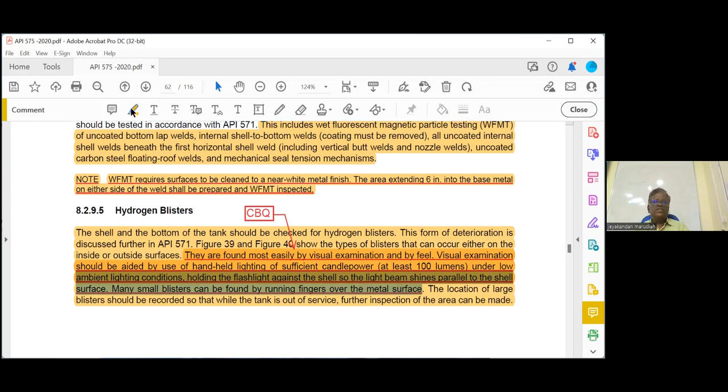Then page number 57. Please go to page number 57.

Cracks at the last three lines, 8.2.9.6.1. Cracks at the shell to bottom joint should receive prompt, focused attention, as the joint is the most highly stressed joint in most tanks. And when such a crack reaches a critical size, the consequence can be catastrophic because the complete tank will leak.

Weep holes in reinforcing plate - when you have a nozzle reinforcing plate, there will be a small hole made during welding to allow the gas to escape. That is the weep hole, or telltale hole, whatever you call it. It should be kept open. You should not close it by welding. You can use caulk or some grease like that, but it should not be completely closed by welding.

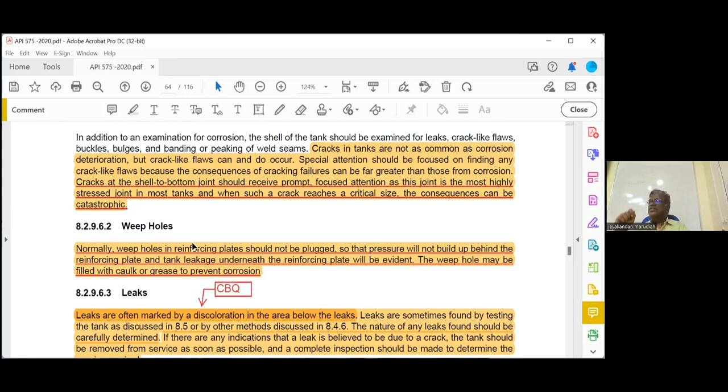Normally, weep holes in reinforcing plates should not be plugged, so that pressure will not build up behind the reinforcing plate, and tank leakage underneath the reinforcing plate will be evident. The weep hole may be filled with caulk or grease to prevent corrosion.

Leaks are often marked by discoloration in the area below the leak. That is important - if there is a leak, there will be a change in color. Discoloration means there is a color change you can see on the surface, due to corrosion. Leaks are sometimes found by testing the tank.

That part is not important, but highlight this: deformation will normally be readily apparent through visual inspection. The inspector should consider that there may be slight deformation near a welded seam or elsewhere in the shell. Deformation can be measured by placing a straight edge lengthwise against a vertical seam, or placing a curved edge - that is peaking, banding, all this.

Deformation caused by the settlement of the tank, wind, earthquake, internal pressure in the tank due to defective vents or relief valves not operating, induced vacuum, severe corrosion, all this.

Then highlight the last paragraph: when cracking is suspected, magnetic particle examination is the preferred method to use. In using this method, the seams to be inspected should be abrasive blasted or wire brush cleaned.

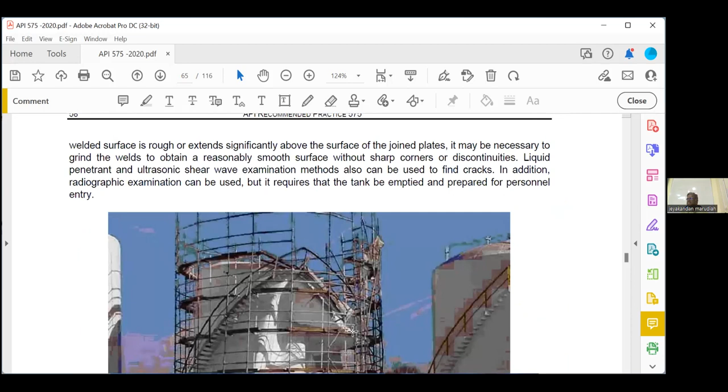Sandblasting, abrasive grit, plastic. Okay, rivet inspection, 8.2.9.7. This is important, open book question. If the tank is of riveted or bolted construction, a visual inspection should be performed, and a number of randomly selected rivets or bolts should be checked for tightness and product leakage.

Movement of the rivet or bolt should not be detectable. It may be advisable to postpone any physical testing until the tank is out of service, and the rivets or bolts can be checked on the inside of the tank. That is an open book question.

Then roof access - how do we inspect an in-service roof? What does the code recommend? This is a recommended practice: don't walk on the roof or fixed roof of an old tank. Suppose the roof is severely corroded, it may not hold the weight of the inspector, so first you have to confirm the strength of the roof.

So what does the code recommend? Use wooden planks which will cover at least 2 rafters, and walk on the wooden planks. Suppose you cannot put wooden planks, always walk on the weld, because the roof uses a lap weld - lap weld means there are 2 plates, so they will have more strength, unless it is established the roof has sufficient strength.

Another thing is, the roof should not be hammer tested. You should not hammer the roof. What will happen when you hammer the roof? In an in-service roof, corrosion product from the bottom side will fall into the oil and contaminate the stored product.

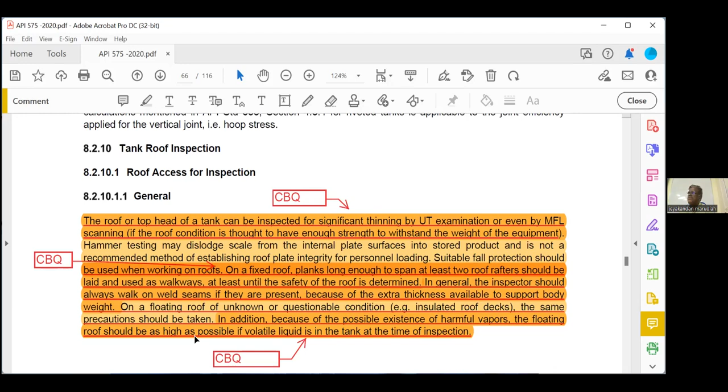Then these are not important.

Please go to the floating roof drains, page number 60, 8.2.10.4. Drainage system on floating roof should be inspected frequently for leakage and blockage. That line is important. Close book question: drainage systems of the floating roof should be inspected for leakage and blockage. If the drains are blocked, an accumulation of liquid can cause the floating roof to sink or be severely damaged. This is especially true when the roof is sitting on its legs or has a poorly contoured deck that does not allow good drainage. Proper operation of check valves in drainage sumps should be verified on a regular schedule, especially for those in fouling or corrosive service.

Then please go to the auxiliary equipment. Suppose you have a buried piping going from the tank, 6 to 12 inch, you have to excavate it. Check the condition whether any soil corrosion is happening on the pipe. When external piping inspection of the buried tank piping is specified, the soil around the pipe should be dug away 6 to 12 inches to allow for inspection. Soil corrosion may be especially severe at such points, so generally 6 to 12 inches is considered the soil-air interface. After the pipe is exposed, it should be thoroughly scraped and cleaned to permit visual and UT examination.

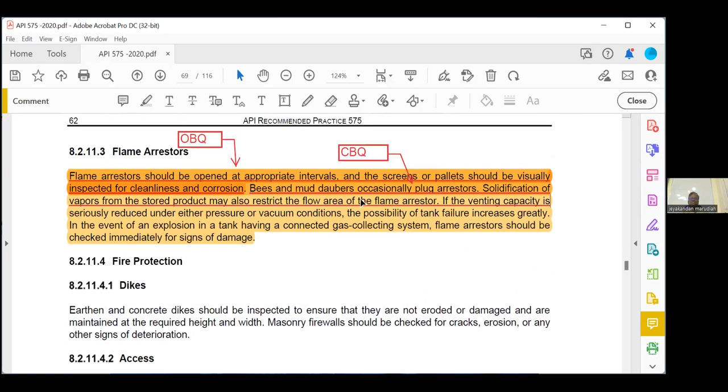Tank bottom. Highlight 8311. A tank bottom can be inspected externally through tunneling or lifting the tank. With technological developments in the industry, tunneling under or completely lifting a tank just for soil side corrosion should normally be avoided. Lifting or tunneling methods may be used when justified by other considerations, besides the code for the soil side.

Generally, making a tunnel at the bottom side for the bottom is not preferred. These are not important, so please go to page number 64.

Roof rafters. So how do we check the condition of the roof rafters? On the roof plate, because roof plates are laid on the rafters, you cut the roof plate, a coupon, and lift that, then you can see the rafter condition, whether it is corroded or not. Coupons approximately 12 inch by 12 inch in size can also be removed from the roof to check for underside corrosion and rafter condition. All coupons should be round or have rounded corners. No square corner coupon should be cut.

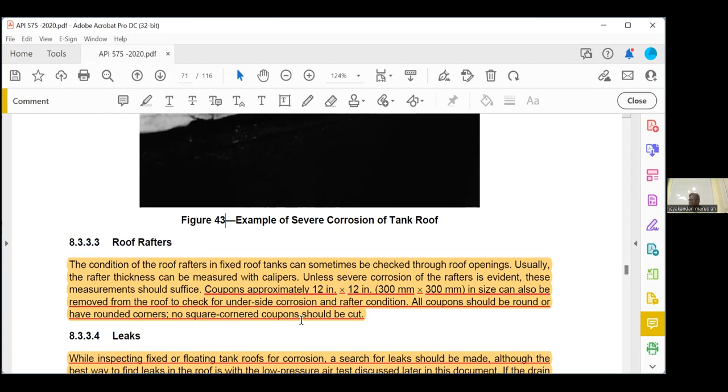Generally, coupon cutting is allowed in roof as well as bottom plate. Suppose you are doing MFL and still have doubt how much corrosion is happening on the soil side, you can cut a 12 inch by 12 inch, 1 foot by 1 foot plate and check the bottom side.

Then after that we will reweld it.

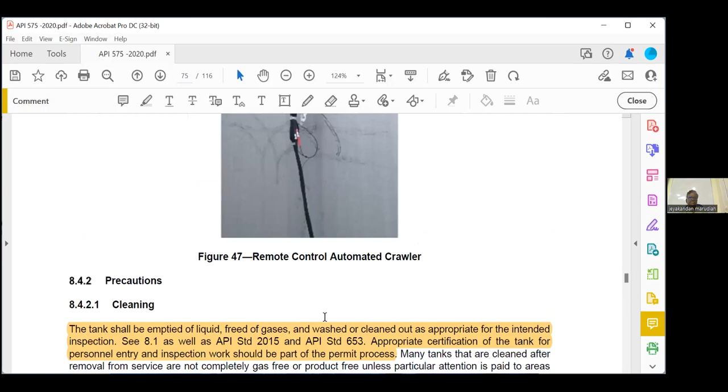Please go to page number 69, first 4 lines. Inspector should be alert to accumulation of dry pyrophoric material self-igniting when exposed to ambient conditions during inspection. These accumulations may occur on the tank bottom, in the seal rim space areas, on top of the rafters. Such accumulations that cannot be cleaned prior to inspection should be kept moist to reduce the potential for ignition. We have to keep it moist.

Then preliminary visual inspection. This paragraph's last line is important - open book. Floating roof tank should be examined for loose or broken seal hangers and shoe bolt heads that can cause abrasive wear. That is important. Open book question.

These are repeat actually, this will all repeat. Then please go to page number - tank bottom inspection, page number 71.

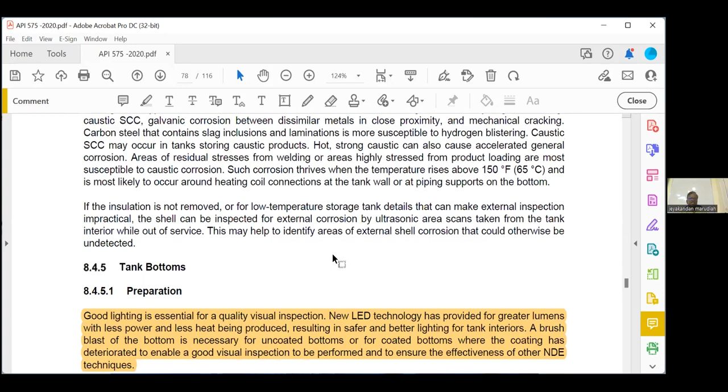Again, there is a coupon cutting. 8452, second para: representative sections or coupons, minimum 12 inch each way, may be taken to confirm the results of MFL or ultrasonic. Suppose you have a doubt whether MFL is correct, you can cut a coupon and check actual thickness. The increasing accuracy of MFL, ultrasonic scanning and other automated methods makes coupon removal less useful, especially considering the time and expense associated with replacing the coupons. Coupons are recommended for assessing the root cause of the soil side corrosion.

Open book question. Then page number 72, statistical sampling. See, what is meant by statistical sampling? Suppose you have a large tank bottom, it is difficult to scan the entire tank bottom. But if you have only a uniform corrosion problem, no need to scan the entire bottom. Only some 10% we will scan randomly, here and there.

Statistical methods are also available for assessing the probable minimum remaining metal thickness of the tank bottom, and the methods are based on the sampling of the thickness scanning data. The number of measurements taken for statistical sampling will depend on the size of the tank and the degree of the soil side corrosion. That is important.

Open book question. So how much percentage you are taking depends on the size of the tank and the degree of the soil side corrosion. Typically 0.2 to 10% of the bottom should be scanned randomly. That is closed book question.

Sir, underneath the bottom plate, how will we come to know whether this is uniform pitting or localized pitting? Underneath the bottom plate, based on the previous experience, if you think only uniform corrosion is happening, then only we can go for a statistical method. Yes, based on the previous experience only.

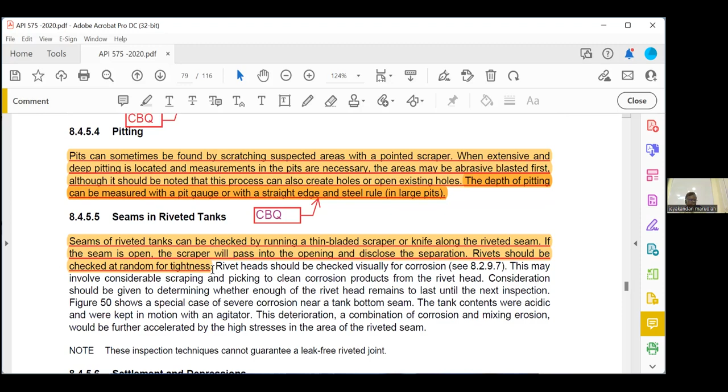Highlight page number 74, first two lines. The area of highest stress in a flat bottom tank is commonly at the shell to bottom joint detail. Shell to bottom is the highly stressed area. Page number 74, first two lines, tank shell.

Now when you open, generally if you take 575, the majority of the questions will be open questions. They will ask you about a particular subject, for example tank bottom, tank shell. So during the exam you have to check the content page.

I think here it is not working. Okay, the content in the PDF they are using works. So just where it is, they will arrange it very neatly. If you say index, bottom inspection, shell inspection, roof inspection, that area we have to search.

Yeah, page number you can choose. Suppose I enter the page number, but Control F will not work. Page number you can choose. Then that is not exam.

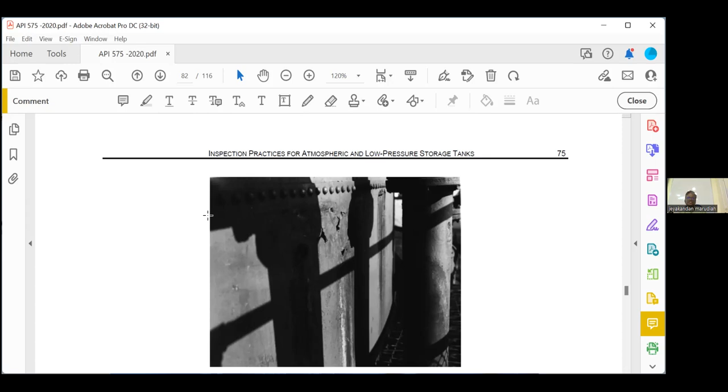But if the search is working, then that is not exam. They will deactivate the page number. I think page number will also not work because in the exam only the required portion data will be available. Just they are asking that we can enter the page number, but it won't help us actually. Page number, because it is very difficult to remember how many page numbers you will remember.

But they are not giving that, for 575 they will give the entire code book. For 650, what have they given you? I think a little bit more, because in chapter 5 in 650 we removed some unwanted pages, but they will give the entire chapter 5 main code. In the exam they give all the code. No, they will not give all the code book.

There is one thing called the exam version by API. The exam version is only the required portion for the exam, that is what they will give. But you can see the body of knowledge. For example yesterday we did 651 — 3 chapters are not covered. Those will be removed from the exam version. Same.

Best is to click the content particular, it will go directly to that page. Just you have to scroll some 3-4 pages here and there, that's all.

One minute, I'm coming. Okay.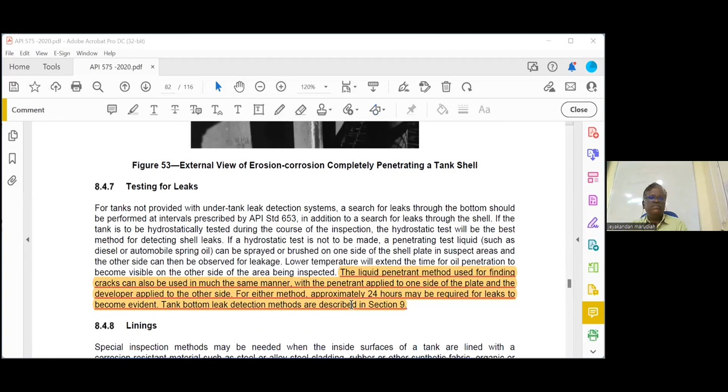So 8.4.7, page number 75, testing for leaks. These are the nine important points. Right, linings.

848, third line: the most important concern is to ensure that the lining is in good condition, there is proper position, and it does not have holes or cracks. With alloy steel or more rigid metal linings such as nickel and monel, inspection should be made for leaks or cracks in the lining joints. A careful visual examination is usually required. If there is evidence of cracking, the liquid penetrant examination method can be used. The magnetic particle examination method cannot be used on non-magnetic materials.

See, here we are talking about the shell lining, not the bottom lining. Shell — sometimes if we are storing highly corrosive material, we can go for a metallic lining, like stainless steel plates, cladding, we can go for it. They are talking about that lining.

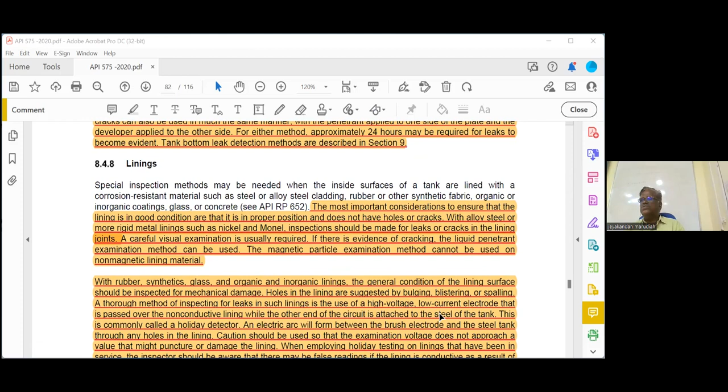With rubber, synthetics, glass, or organic and inorganic linings, the general condition of the lining surface should be inspected for mechanical damage. Holes in the linings are suggested by bulging, blistering, or spalling. A thorough method of inspecting leaking such linings uses a high voltage, low current electrode that is passed over the non-conductive lining, while the other end of the circuit is attached — so that is what we call a Holiday spark test, commonly called a Holiday detector.

An electric arc will form between the brush electrode and the steel tank through any holes in the lining. Caution should be used so that the examination voltage does not approach a value that might puncture or damage the lining. When employing Holiday testing on linings that have been in service, the inspector should be aware that there may be false readings if the lining is conductive as a result of being immersed in the product. As a consequence, Holiday testing may not be accurate.

See, remember yesterday in 652, in service, if you are going for lining, first you have to dry the lining, because if there is moisture absorption and water is absorbed inside, it becomes conductive. Okay.

Then highlight this one.

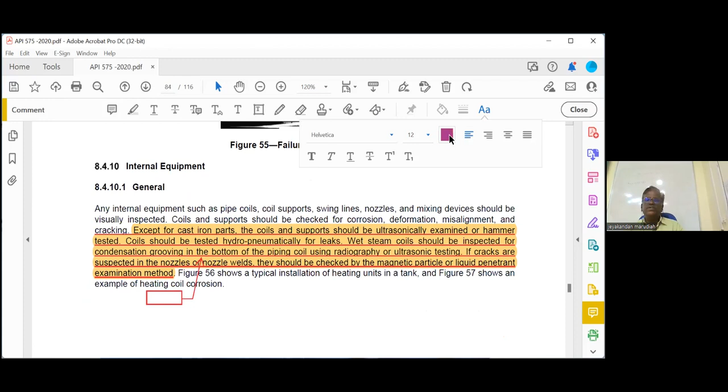Except for cast iron parts, the coils and supports should be ultrasonically examined or hammer tested. Coil should be tested hydropneumatically for leaks. Wet steam coil should be inspected for condensation grooving in the bottom of piping coil using radiography or ultrasonic testing.

That line is important. For wet steam coils only, you have to check for grooving in the bottom of coil by radiography or ultrasonics.

Then swing lines, next 8410-2. So what do swing lines mean? That is the drain lines which have swing joints. Swing lines of floating roof tanks may be equipped with pontoons, rollers, or tracks.

The pontoon should be hammer tested and checked for leaks. The thickness of the pontoon wall can be measured by ultrasonic testing. The tracks and alignment rollers should be inspected visually for corrosion, wear, and distortion.

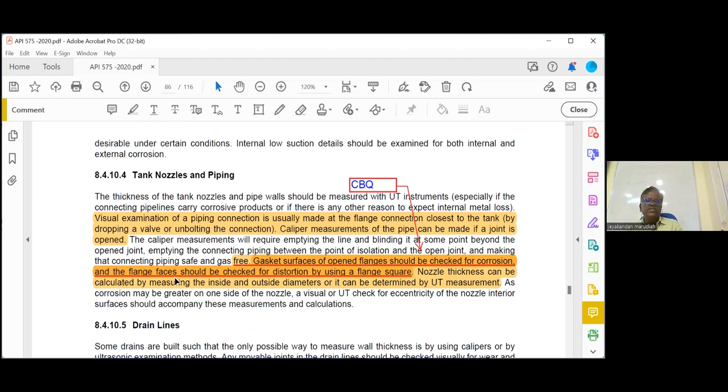Then next page, page number 79, tank nozzles and piping. This is important close book question. Gasket surfaces of opened flanges should be checked for corrosion, and the flange face should be checked for distortion by using a flange square.

Then drain line—how will we check the drain line is leak free? So we have to do the hydro test. During the shutdown, the floating roof drain lines, we have to do the hydro test. They will do two pressures. First, they will test with high pressure 30 psi, then with low pressure.

Because some swing joints at high pressure will not leak—because of the pressure, they will become tight. But at low pressure, they will leak. So we have to do two hydro tests of the swing lines.

For the drain lines, including the joints, tightness can also be tested by pressure testing with water. If designed for internal pressure, it has been found that a two-stage hydrostatic test pressure is desirable. The first step is to test at about 30 psi gauge pressure for approximately 30 minutes to detect any leaks in the pipe, hose, or rigid joints.

The pressure is then reduced to approximately 5 psi gauge for another 30 minutes to test for the tightness of the swing joints. Swing joints may be self-sealing at higher pressure, but will leak at the lower pressure. That is open book question.

Sir, what do you mean by swing joint? Swing joints, okay, I will show you. The test pressures are for pipe joints, pipe to pipe, the external floating roof joints.

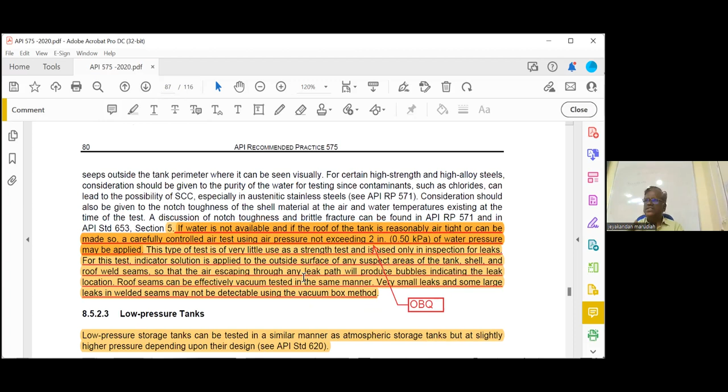For this test, indicator solution is applied to the outside surface of any suspect areas of the tank shell and roof weld seams so that air escaping through can be detected. So the entire tank we can go for a test. It is given in this also, 650 also, 2-inch water pressure. That is open book question.

Then these are not important.

Then please go to page number 82, 9.2.3, evaluation of bubble examination pressure. For this method, the inside surface of the bottom is coated with an indicator solution. Air at no more than 3-inch water pressure is injected by a hose under the bottom of the tank through the clay seal or through a drilled or tapped hole in the bottom.

So what is the pressure you should know? That is the open book question actually. Here 3-inch water pressure, that is for the bottom. If you want to test the entire shell and roof, 2-inch water pressure, you can see here. This is 2-inch water pressure.

Then vacuum box, 9.2.4. A vacuum is developed inside a box by means of a vacuum pump or air ejector connected to the box through the hose. Leaks will appear as bubbles when looking through the glass top of the vacuum box. This method requires a minimum vertical clearance of 6 inches between the bottom and any obstruction for the placement of the device. Highlight this one, 9.2.4.

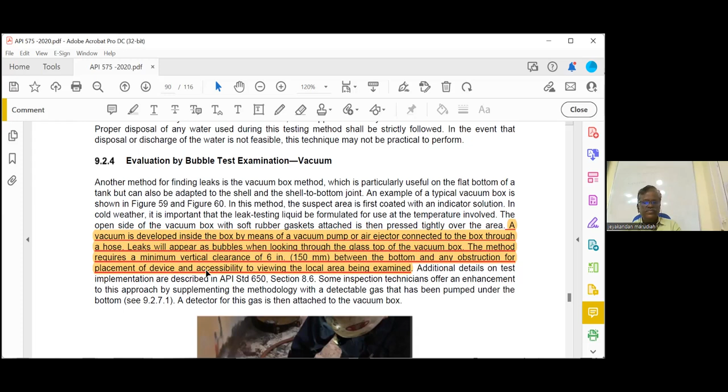Then please go to evaluation by under bottom injection, page number 85. So you can use a tracer gas also. Another method being used successfully is the injection of inert gas with a tracer element under the tank, page number 85. An advantage of this method is that welded repairs can be made immediately with the inert gas under the bottom, and a recheck can be made immediately after repairs.

So what inert gas are we using? Third paragraph: welding grade helium is a common gas used for this application. Then highlight this next paragraph. This method of testing is applicable to 100% of all bottom plates, welds, bottom to shell, patch plate welds, clip attachments, sump pumps, weld scars, anything we can check. So this is actually the helium tester.

Page number 91. Repairs to riveted and bolted tanks. Highlight this also. Repairs to these tanks may also be made by welding if the weldability of the steel is first confirmed by physical testing. Even a riveted tank can be repaired by welding.

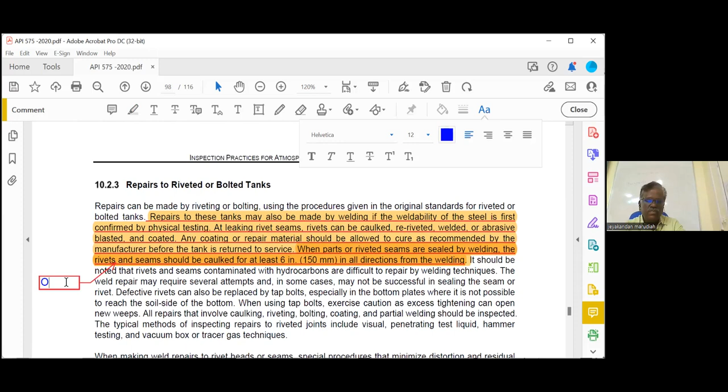Now, bottom repairs. So how much, see, when they are new, when you are installing a new bottom, we can see in the next page, there is a sketch. This is a new bottom plate. It is an old bottom.

So we will install the shell and we will fill with sand, clean dry sand here. So how much outside do we have to fill? At least 3 inches more if the bottom shell is seriously corroded. This is important. A perimeter layer, previous page, 10.2.4.

So a perimeter layer of clean sand fill, metal grating or a concrete pad should be installed under at least 3 inches beyond the projection of the new bottom, so that the shell is supported on the foundation through the new bottom. So 3 inches outside also you have to fill it with.

We can do this only if we don't follow cathodic protection, right sir? No, if a bottom is severely damaged, even cathodic protection, yeah, generally if it is cathodic protection, bottom side. Because otherwise we need to remove the bottom. We can't follow the 3 inch extra height from the previous base, right? No, you are confusing many things actually.

Okay, this is when the bottom is severely damaged due to various reasons. It may be due to bottom corrosion or top side corrosion. It may be a combination of both, in which case repair is a waste and will take a lot of work. Instead we will go for a replacement of the bottom.

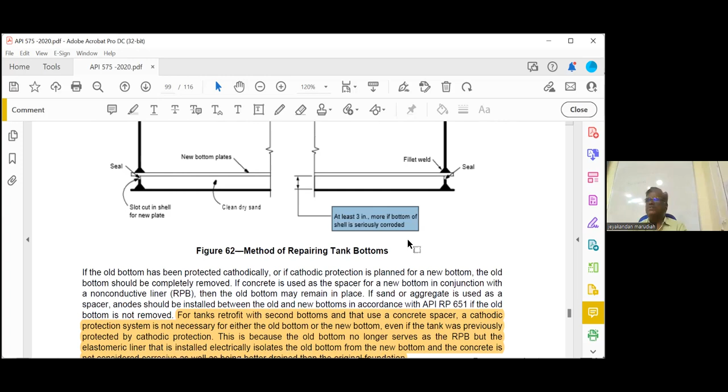Please go to page number 94, non-metallic roof plate. Even soft patches are allowed. You can see the sketch here - you can put a soft patch. Like our buildings, they use building soft patch. Even our buses use a soft patch to avoid leakage. Yes, you can use a soft patch. It is considered as a repair method.

Tank roof, mastic roof, you can use this. So this is important: leaks in roofs can be repaired by non-metallic carbon fiber material or by soft patches that do not involve cutting, welding, riveting, or bolting of the steel. Soft patches can be made from a variety of materials including rubber, neoprene, glass cloth, asphalt, and mastic or epoxy sealing materials. The choice depends on the contents of the tank and the service condition. The patching is applied in much the same manner as similar patching applied to the roof of a building, so we can use a soft patch.

Open book question. Then please go to page number 95, safety consideration.

This is important. Soil foundation - that have washed out or settled under the bottoms of an atmospheric storage tank can be repaired by pumping sand, drilling mud, clay, lean concrete, or similar material under the tank. So suppose soil foundation is corroded - if the foundation is corroded, we have to correct it. How can we correct it? By pumping sand, drilling mud, clay, or lean concrete. We can put additional concrete or mud to fill this.

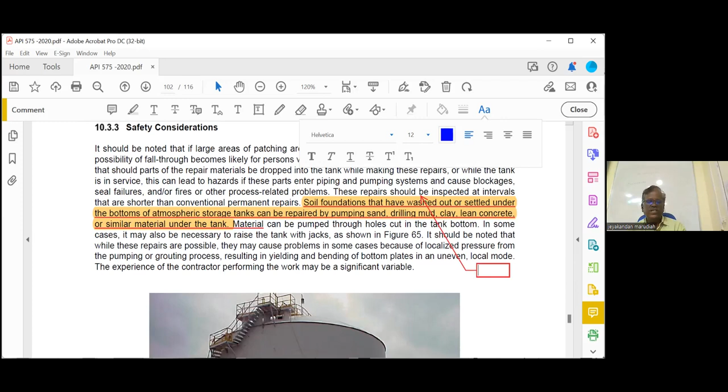That's all for 575. These are not important, I think. 1 minute.

Similar service - please go to Annexure B, similar service evaluation table.

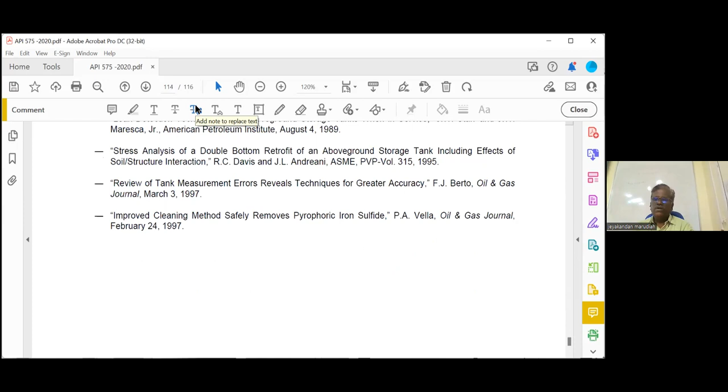Okay, so this is the completion of 575. We have completed all the main codes. Now I will start the common code, just to begin the introduction.

In the afternoon we will review questions from 651. We completed 651 yesterday, right? We'll do 652 and 575 in the afternoon. Let us go to the common code books.

Just half an hour we will go. So if you see the common code books, we have 3 code books: 577 2020 edition, ASME Section 5 2019 edition - for Section 5 we have only articles 1, 2, 6, 7, and 23 - and Section 9 2019 edition. This common code books will have around 20 questions, sometimes a little bit more than 20.

If you already have welding and NDT knowledge, these code books are very easy to score. Now I will start with the NDT Section 5, then we will go to 577, then we will go to Section 9 last. So first...

NDT - generally, how many questions will they ask? Around 8 to 10 questions will be asked in NDT. In API exams, NDT questions will generally have around 8 to 10. So the general pattern is: PT will have one question. Which code do you have to refer to? ASME 5.

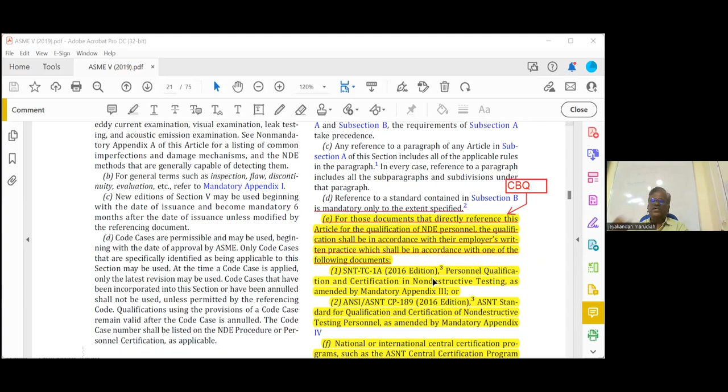For those documents that directly reference this article, for the page number 1, ASME Section 5, page number 1: Qualification of NDE personnel. The qualification shall be in accordance with the employer written practice, which shall be in accordance with one of the following documents: SNT-TC-1A, still they are following 2016, CP-189 2016 edition, or ACCP also we can do.

Very rarely asked, but please remember, if there is a reference code answer available, that is the most correct answer. If it is not there, and the employer written practice also is not there, then only you will go for SNT-TC-1A or CP-189. So don't think SNT-TC-1A is the first choice. It is not the first choice, it is the last choice.

You can see clearly: for those documents that directly refer to this article, for the qualification of NDE personnel, the qualification shall be according to employer written practice, which shall be in accordance with one of the following. How will you write the employer written practice? By SNT-TC-1A or CP-189 or ACCP.

Right now, before going to Article 2, radiography, just briefly I will compare the 4 NDT methods so that you can have some idea. Please remember, exam questions will be based on code requirements, not on your general knowledge about NDT. Sometimes what you think is different from what is said in the code. That's why sometimes people say NDT questions are easy, but if you see the final result, they don't score much in NDT. The reason is what they are thinking is different from what is given in the code.